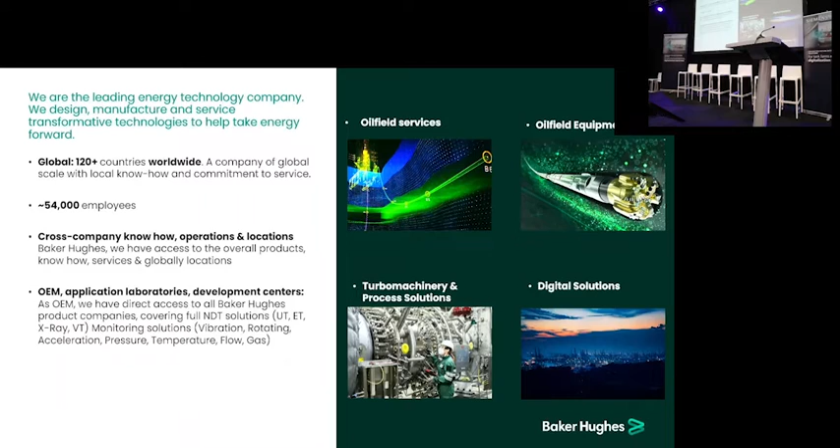Here I've got a little bit of a slide on who we are. We are quite a big player. We dig up the oil and bring it to the refinery, and we help the big oil companies with that. I've got some colleagues around the world.

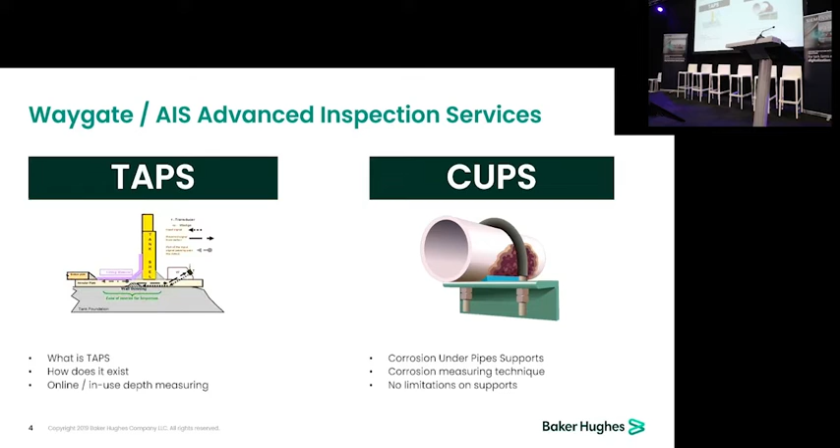But today it's about taps and cups. I think you're familiar with taps - we call it a tank annular plate scanner. How does it exist? The other thing we found when we developed this technique is that it's also suitable for cups, and it's called corrosion under pipe supports. If we take a closer look at the tank annular plate scanner...

It's about inspecting the first, let's say, 150 to 300 mm underneath the annular plate, and we do this with a technique called the guided wave technique.

Now, how does it exist? It is the critical zone on the inner side of the tank, under the inner fillet weld. There you have the critical zone, the heat affected zone. Corrosion starts there first.

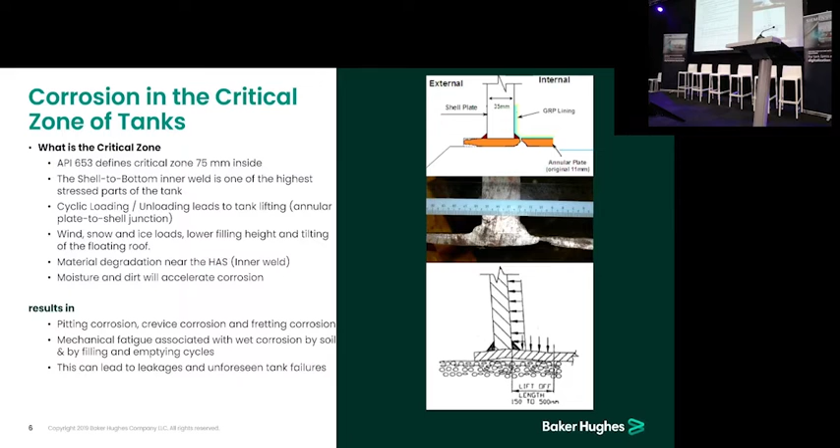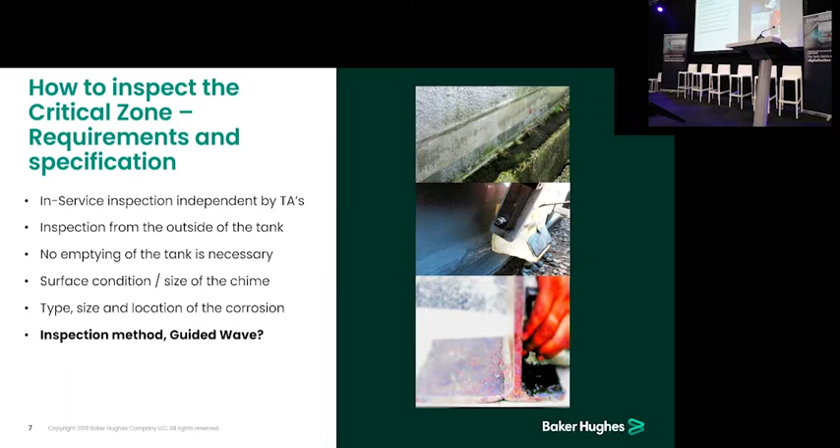So we have a sensor driven by a robot, and the sensor runs over the chime. We do it in service, so it's independent of the liquid inside the tank. It's independent of whether it's in service or out of service, and we can do it at quite high temperature, using a method called guided wave - but it's not the standard guided wave.

We sort of tweaked it into a bulk wave sensor, and we call it a higher order mode cluster. So what happens is we send in a bulk of solitary waves that penetrate sort of unhindered into the metal, and we get a big bulk of waves back. In a dispersion curve we find a very crystal clear signal, and therefore it's very high accuracy in sizing the defect.

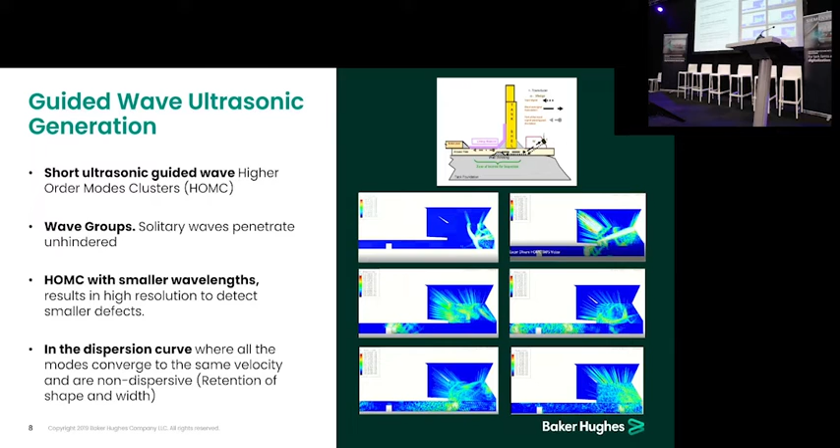This is a little bit of the specification we have on this technique. So we size the defects in bands of 20%, and even if the chime is quite smooth, we can reduce it to 10% bandwidth. We need a situation with about a 40 mm chime. We recently started to develop some smaller sensors, so if you have a 20 mm chime, we can even put it on. But we need a minimum defect of about 1 inch - otherwise we can detect the corrosion, but we can't really size the corrosion.

The wall thickness of the plate is important - 5 mm. We have up to 70 degrees product temperature we can use the system with, and we've got a very small dead zone, almost within the probe length. So if you put the probe on the chime, it's very close to the side of the tank.

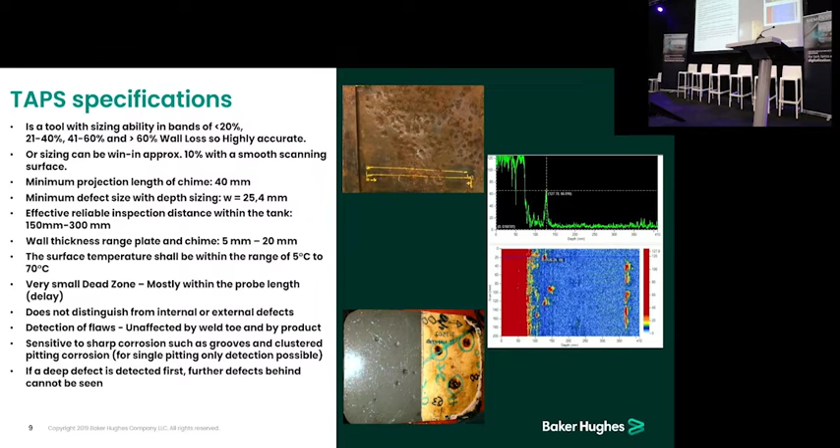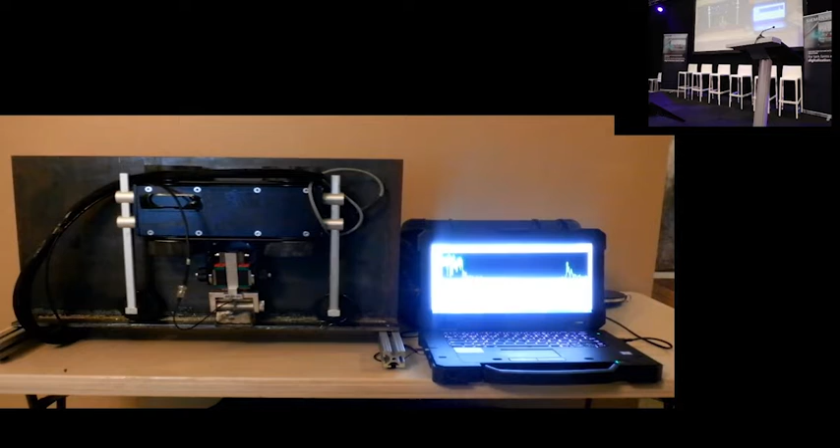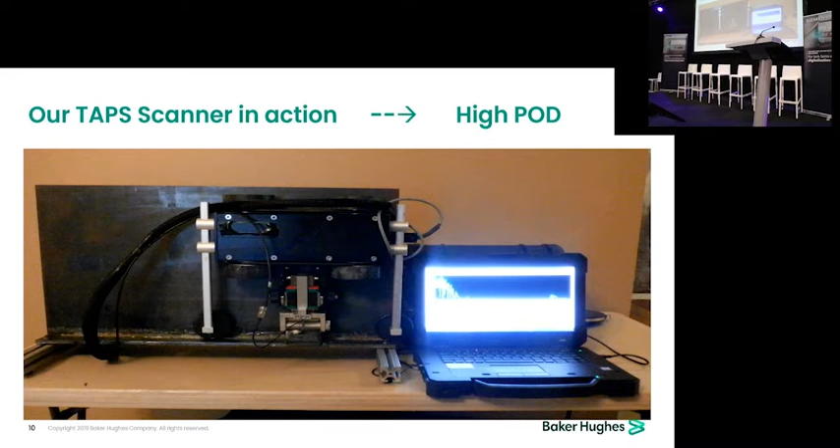How does it look like? Here's our robot. We put it on a plate, and it runs automatically around the chime. Of course, if you have some pumps or nozzles, we cannot inspect over there, but we can normally do about 80 to 90% of the tank.

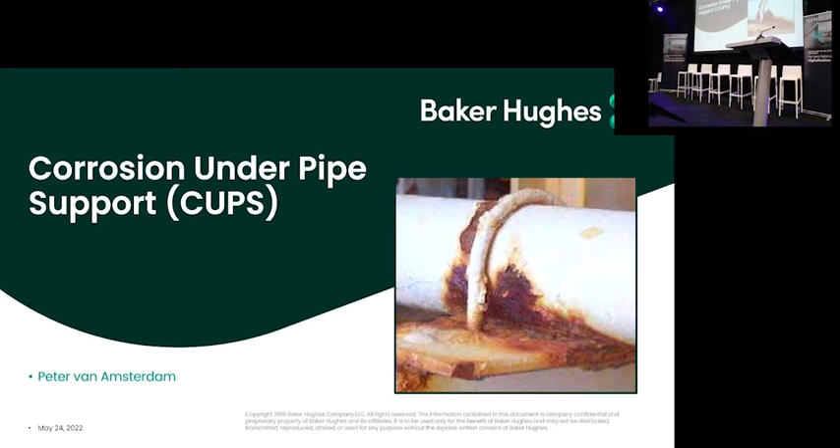So that's the technique we use on an annular plate. But we found out that we can put these sensors also on pipes, and we call this CUPS - corrosion under pipe supports. Here we see some pictures of corrosion. I think you're all familiar with this problem.

What we noticed is that we can detect and size corrosion already from 2-inch pipes, and it's quite small. We can size in approximately a bandwidth of 10%, starting from 20 up to 70. Here you need a minimum size defect of a 1/2 inch, depending on whether you can put the transducer on 2 sides of the support.

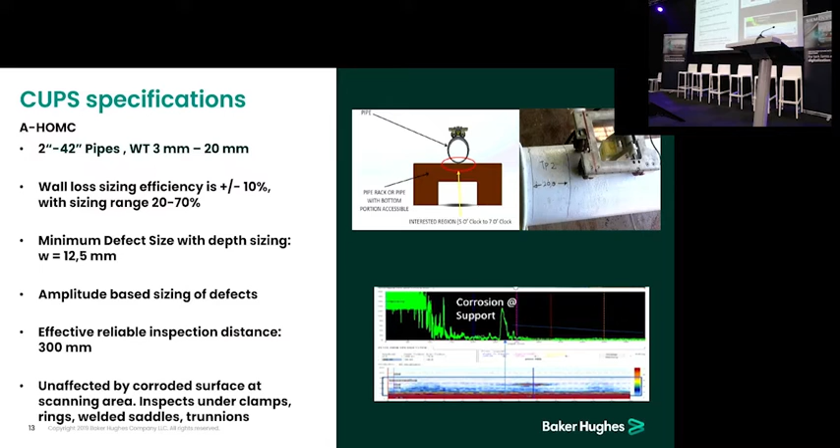We can do it in 2 different ways. We have the axial scanning, meaning sending the signal through the length of the pipe, but we can also do circumferential scanning, and then we can inspect pipe supports or ring supports.

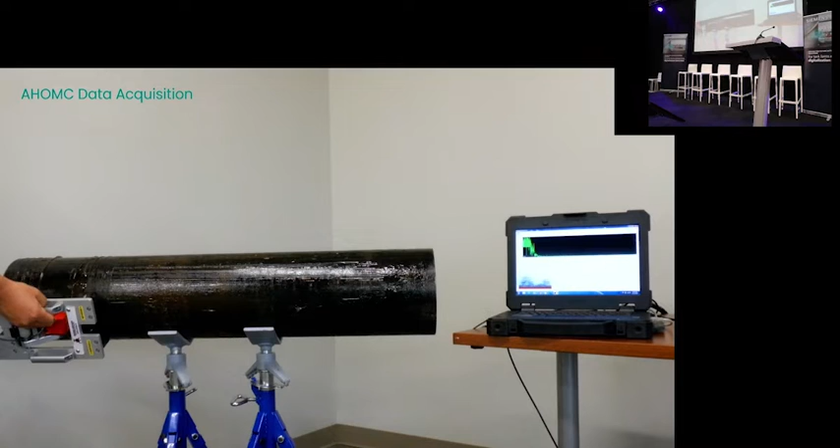Here you can see a little video of an A-scan, meaning sending the signal into the pipe. So if you have a ring support, you can inspect these supports. First we do it on one side, but to be a little bit more accurate, we do it on both sides.

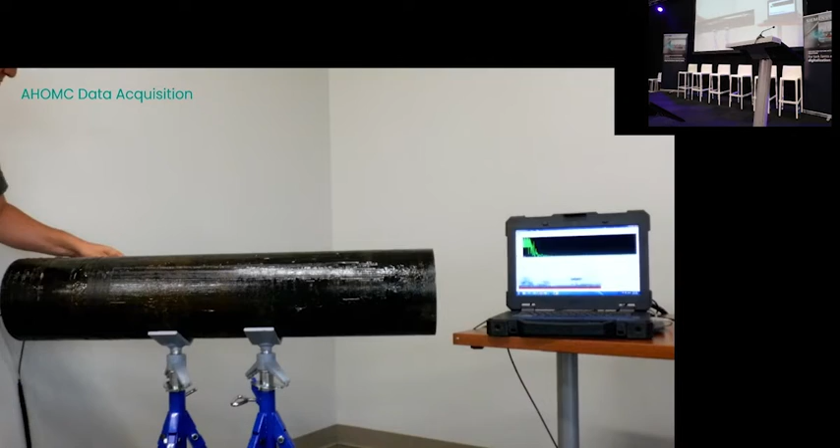But we can do it also circumferential, meaning that we can run the scanner over the pipe. So if you have, for instance, a pipe laying on a concrete slab with corrosion at the 6 o'clock position, we can actually run the scanner endlessly.

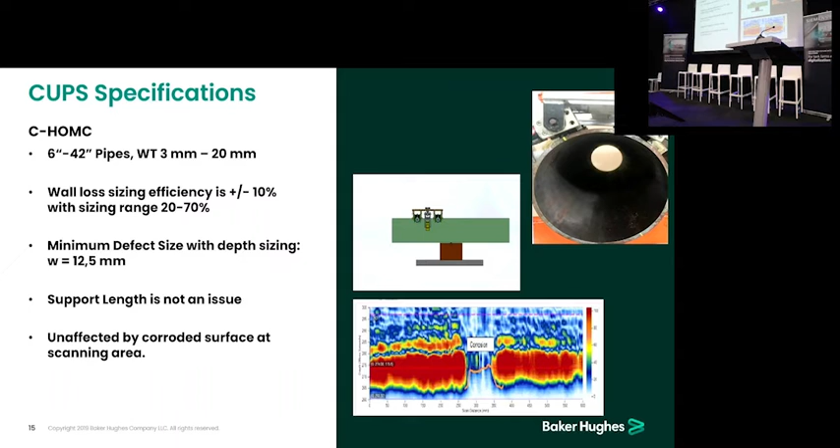Here are a little bit similar specifications. At the moment we use the scanner from 6-inch, but we can do smaller ones as well, and otherwise we use the A-HOMC technique. Here you can see the video when it's running over the pipes.

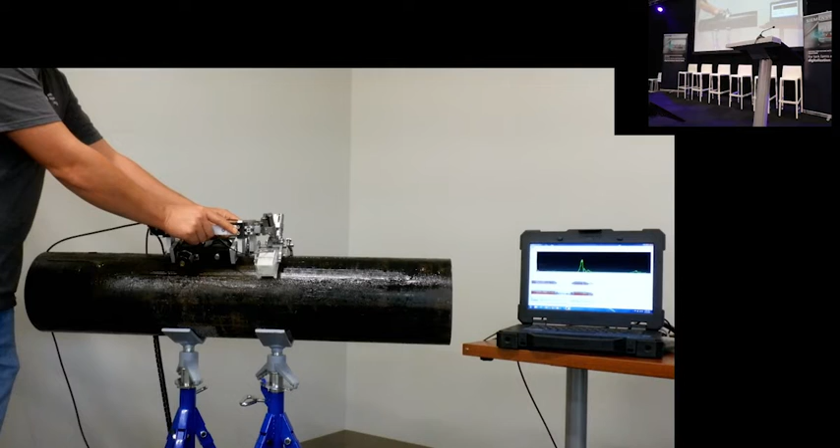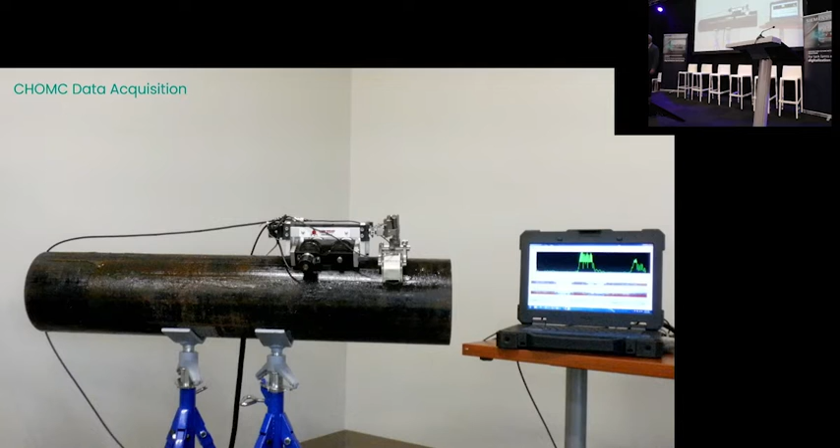We can do up to about 30-35 supports a day, depending a little bit on the situation. Of course, when you are at height or you have a lot of different sizing, then we always have to rebuild the scanner.

We have a clear report. We have not only the numbers, but also the pictures from where the defects are found, how the situation is, and the scan.

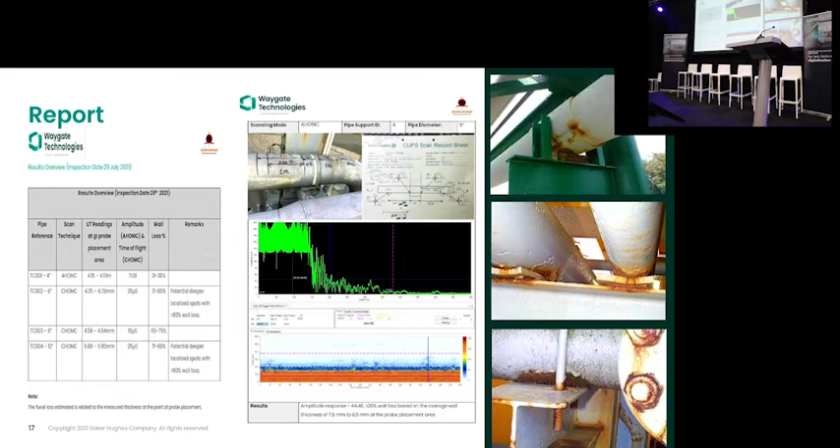So if you want to pitch our product a little bit against the competition, I think we are highly accurate on sizing the defect.

We can do very small piping, 2-inch. We can do axial and circumferential scanning, so ring supports are not a problem. We can run unlimited distance. We are unaffected by corroded surfaces. And we also have trunnions and scabbing, which we can do.

There is a HOIS trial coming up this year. We are participating to get our system qualified. We have clear reporting.

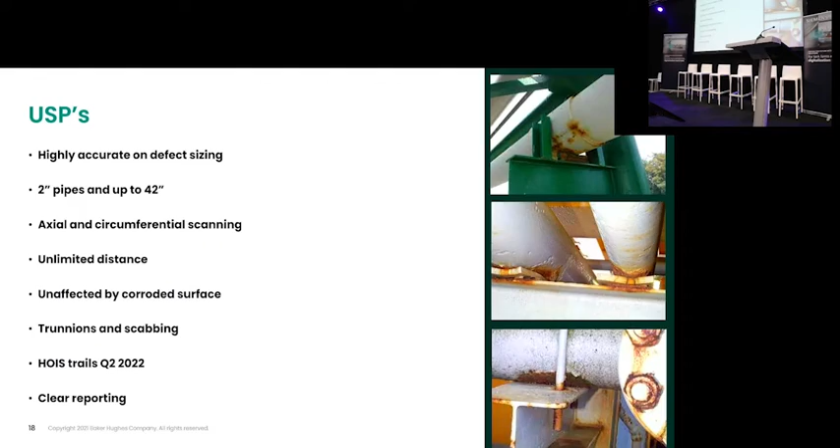So here we have the scabbing. We can do this on a live asset. Make sure that you know what is still your remaining wall thickness before you start doing maintenance work on the corrosion.

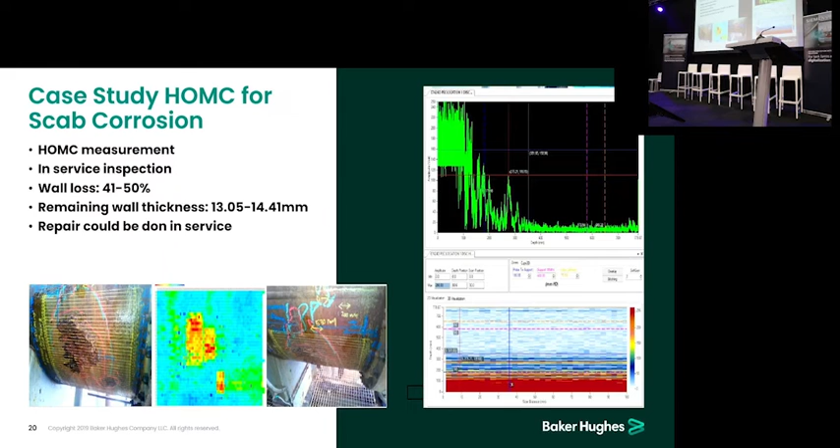And we also have good results on doing trunnions. The signal is unaffected by the welded support on the elbow, and therefore we can do trunnions.

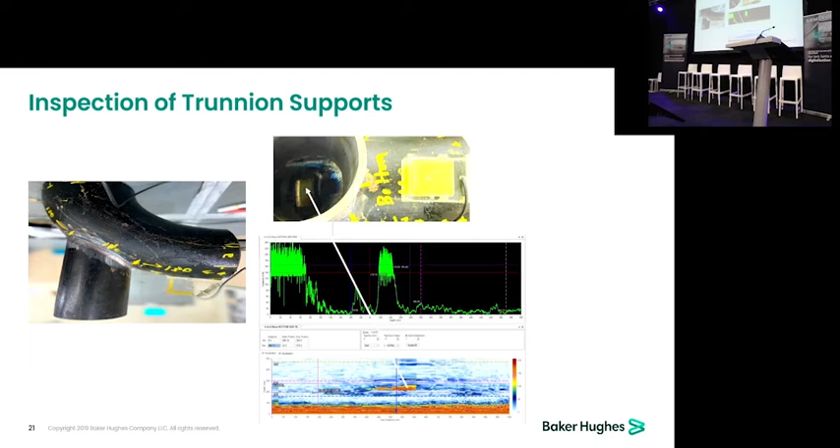Any questions? And I think I'm in time.

Hello everyone, this is Mohammed Al from Saudi Aramco. I would like to discuss with you one of our challenges with corrosion under pipe support.

Sorry, can you repeat the question? Yeah, this is Mohammed Al from Saudi Aramco. We have faced a challenge with one of our pipelines, a 20-inch pipeline. It is elevated above the ground, with a wear pad every 12 meters. We have found corrosion between the main pipe and the wear pad itself. Is there a way to inspect this wear pad and discover if there is corrosion, and quantify the corrosion percentage?

So, actually, the pipeline is welded to a wear pad. The width of the wear pad is 50 centimeters. It is starting from the 4 o'clock position up to the 7 o'clock position.

Yeah, I think I understand you, because I cannot hear you well. Can you hear me now? Yeah, it's better. Okay, we have a pipeline, 20-inch, elevated above the ground, and every 12 meters there is a supporting beam with a welded wear pad to the main pipe. The construction of the wear pad is equipped with a weeping hole. It was constructed a long time ago, so we have found corrosion scale between the wear pad and the main pipe itself. We are trying to inspect this wear pad to identify or quantify the corrosion percentage.